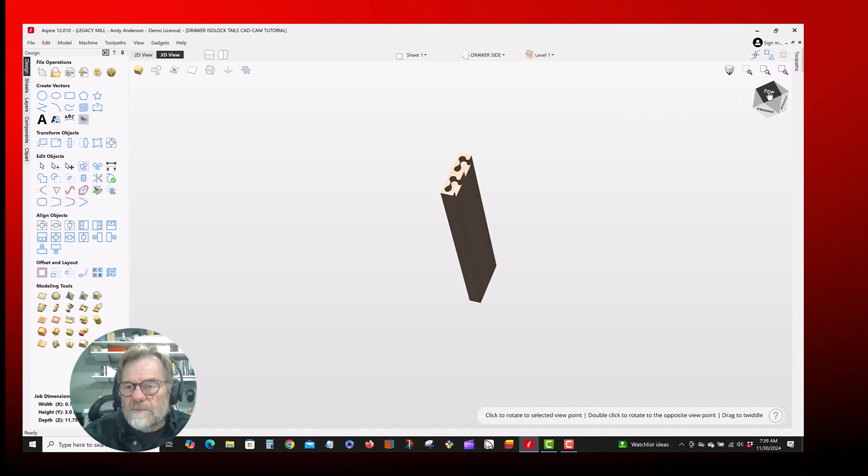I've already done the first step, which is to take the file we did in the last tutorial and copy it, rename it as tails in the CAD/CAM tutorial. The next thing we're going to do is take a top look. We're going to go back to the 2D drawing view, and there you'll see the reminder of what we created and the construction lines and everything we used. Then we created this side panel from that.

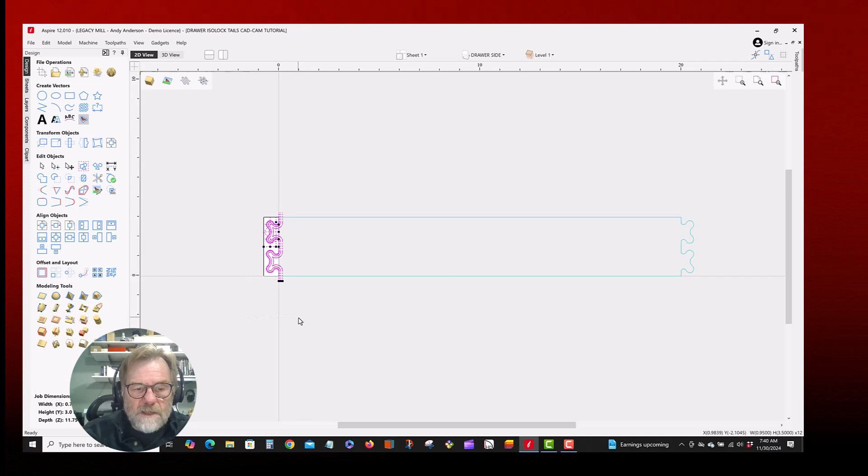So the next step is to do a little bit of house cleaning. We really don't need any of these vectors, so I'm just going to highlight them and delete them. And over here in the toolpaths, we have 4 toolpaths that we used to create the pocket, and we don't need those. So I'm just going to right click on that and delete everything that's visible. If I have a check mark, then it's considered visible. So we've got that out of the way.

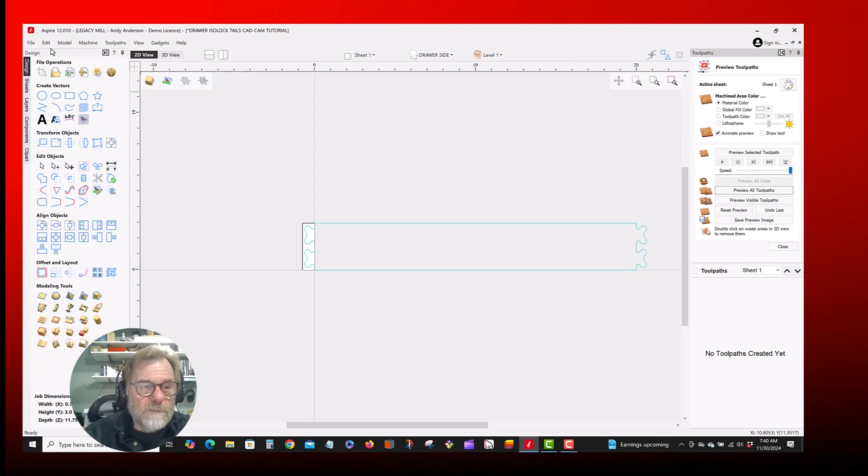Now we're ready to create the new part. To start a new part, we go to the edit pull down, drop down, and we're going to go to the job size. This drawer panel needs to be 21 3/4 inches deep. The height of this is 3 inches, but I'm going to make this 3.5 to give me a little bit of room to work, and the thickness will be 0.75.

Now on the pins, we cut that part vertically, so the material surface was my Z0 position. On this part, we're going to cut it on the machine bed, out of sheet goods, so we're going to move that. We're also going to change the XY datum point from the right side corner to the left side corner, which would be more traditional for sheet goods. Now my part is set up, so let's hit OK here.

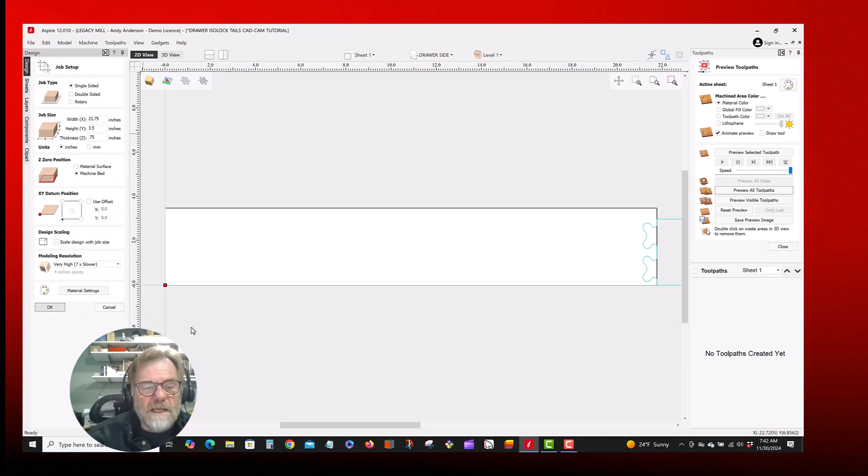And we'll go back and grab the side vectors that we drew in the last tutorial, and I'm just going to position it in the middle of my part. Now that it's positioned in the part, we can trim this up or do whatever we need to do to create the toolpaths. The first thing I want to do is modify this so that my tails and pins aren't a 0 fit.

I want to have a little bit of space in there, and to do that I'm going to use my offset tool here. Nope, I'm getting ahead of myself. To do that, I need to break this apart. So right now it's one continuous vector.

If I go to the node editing mode and I just click there and then right click, I can cut the vector, and that gives me a green dot indicating where I'm at. Now I'm going to break this one by doing the same thing, so I get another green dot, and I'm going to cut that vector, and do this, and cut that vector. Now I'm going to take this and do an offset.

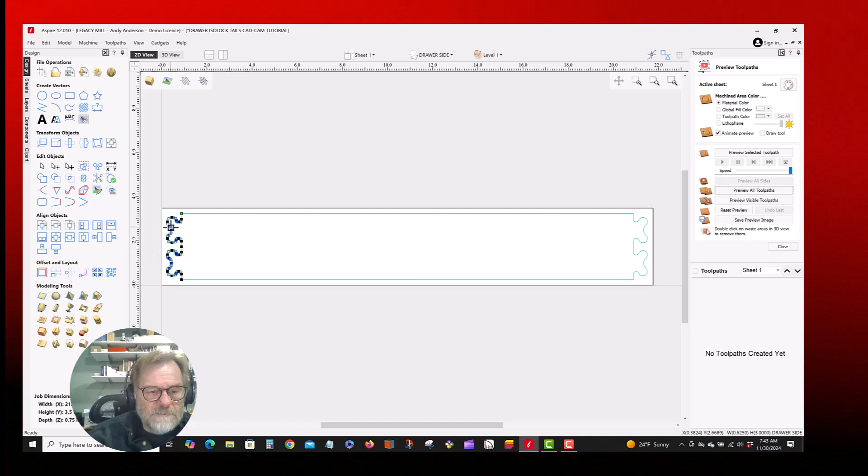Okay, now that I've broken the vectors, I have 4 separate vectors. I have one here, one here, one here, and of course one down here. We want to modify the end ones. I'm going to go over here and just go to the regular arrow so I can go back to regular editing. I'm not node editing anymore, so I'm just back to regular editing.

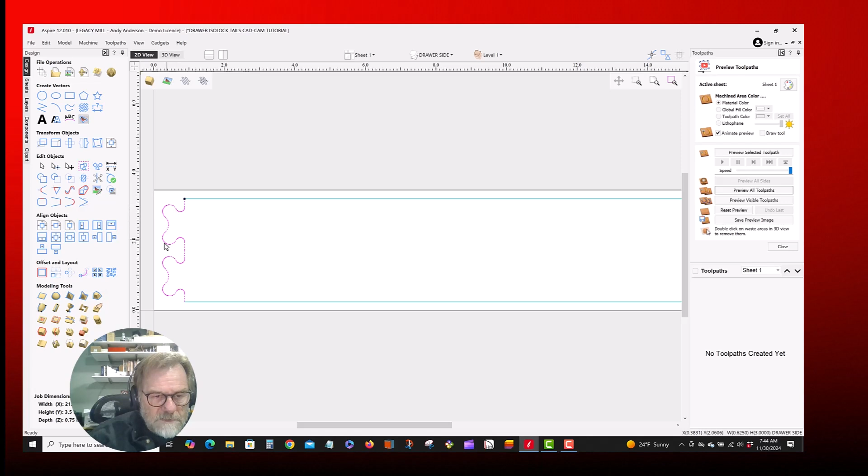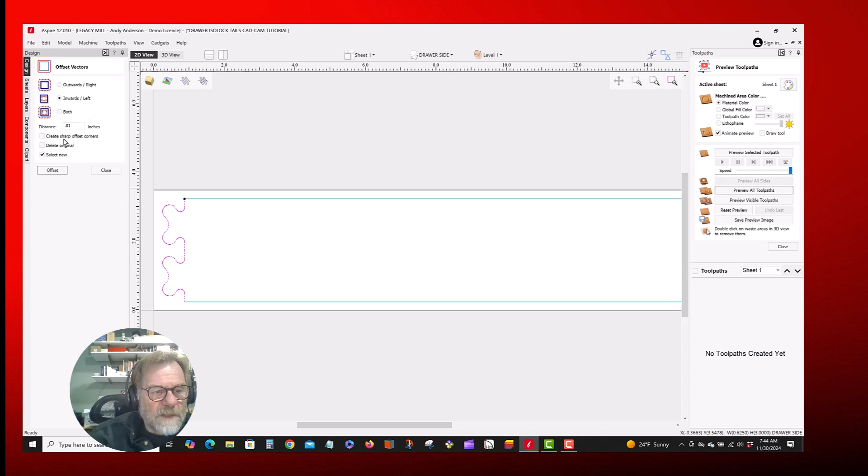So I highlight this, and I want to make these tails smaller by 0.010 of an inch. I'm going to go to my offset and move 10 thousandths. It's already set up at 10 thousandths. If I'm looking at the dot, the black dot facing the line, I can see that if I were going to move it this direction, it would be to my left side. So I'm going to put left. And I'm also going to delete the original and select the new one.

So there I go. Now if I zoom in real close, you can see that we moved over 0.010 of an inch, so those tails are now smaller by 10 thousandths of an inch. We're going to repeat that here, and standing at that point, looking, we'd be going to the right. So we're going to do that again. There we go. Now this is almost there.

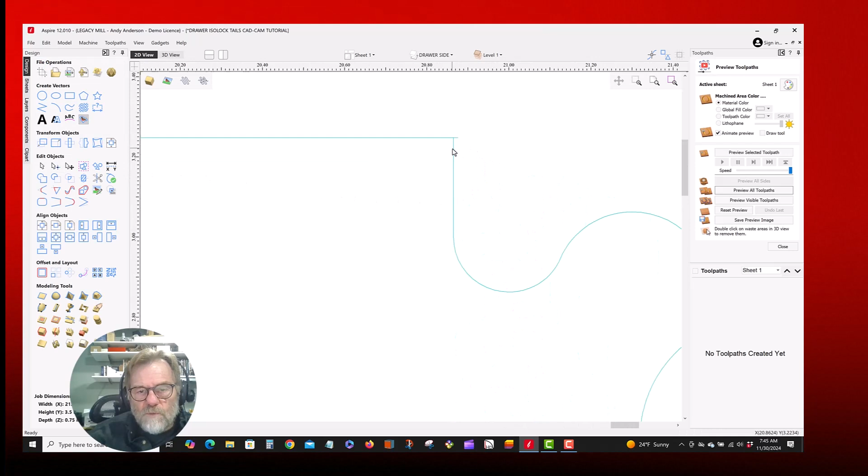I don't want to make my part shorter, I just want to make those tails smaller. So what I'm going to do is move to the end of that line by using my move tool. I'm going to go to the relative position, and in my x-axis I'm going to move 10,000ths. That's good.

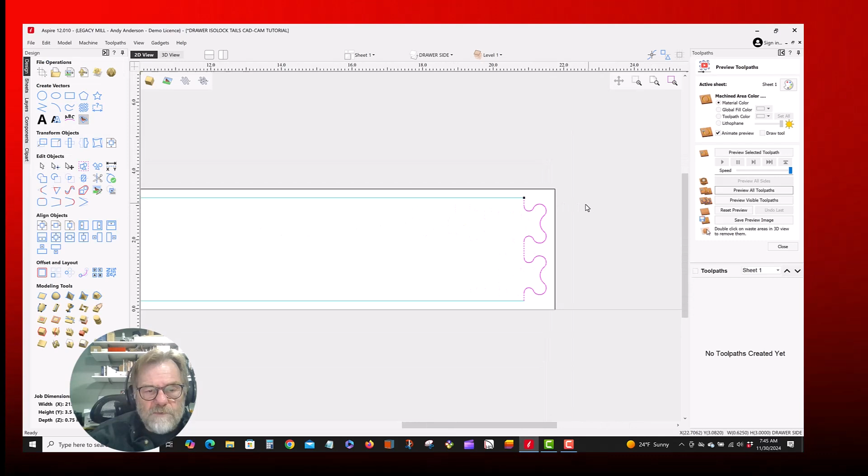Over here I need to go minus 10,000ths, minus 0.01, because we're going the opposite direction. Now I have tails that are just slightly smaller. We're going to take these, highlight them all, hold down shift, and use the join tool to join those together.

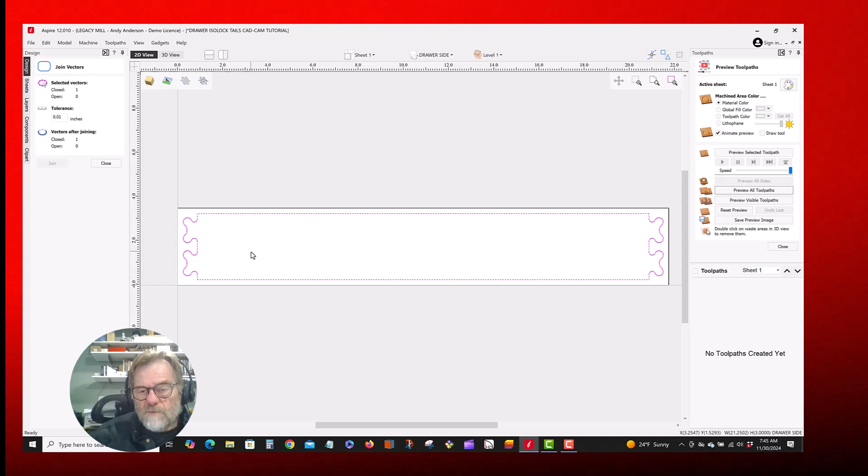Now we have one solid vector and we're ready to start creating the rest of the toolpaths. I'm going to go up to my layers. Layers, as you'll see as we move along, especially in the bonus section on how to build an array and transfer your toolpaths, are going to become important.

This says Isolock, I don't want it to be Isolock anymore, so let's rename this and call it the tail pocket. Let's take this one and rename it the bottom panel dado. We're not going to change the construction line, so we don't need to worry about that, and the drawer side is the drawer side.

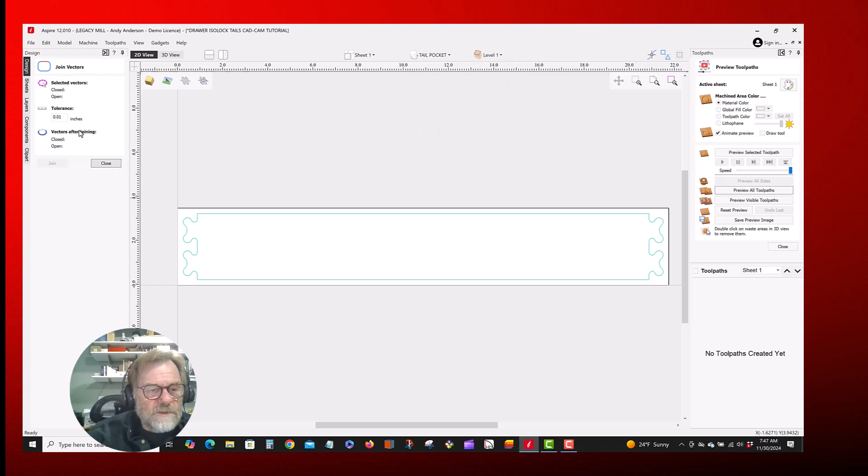Let's go back and start getting some work done. I'm going to switch to the tail pocket, and what I want to do is draw a box around the tails because I want to pocket that down. I have a 3/4 inch piece of material, and my pin pockets are only a 1/2 inch deep, so we want to take away a 1/4 inch of this material.

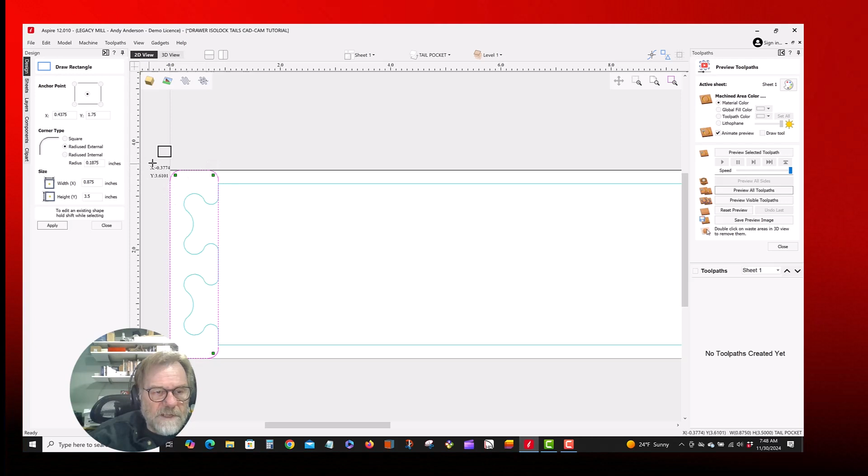Now we're going to create the rectangle pocket, and the thing I love about Vectric's Aspire software is when I hover over that I get that semi-construction line. When I hold the mouse key down I can just slide here and I've created that. Now I left this with some radius corners, and that's just fine, so that will become one of the pockets on the pins.

I'm going to come over here and do the same thing, just hover there for a second, then move up to the edge of my material, slide down to the bottom corner, and let go of the mouse. Now I've got 2 pockets ready to go. That was pretty easy.

Let's go to the bottom dado panel. This is important to make sure we keep everything organized. We're going to create another rectangle here, and this rectangle is going to be 20 3/8 long.

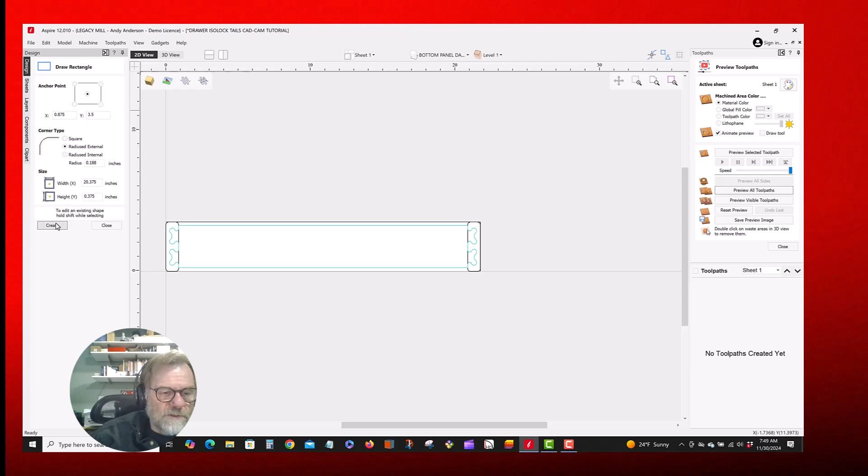I practiced a little bit so the numbers are already hanging in there, and 3/8 wide. Here I can choose exactly where I want to put it, but I'm not going to worry too much about that because I'll show you how I just move things around. So I'll create that, and for right now I'll just stick it in the middle of the part.

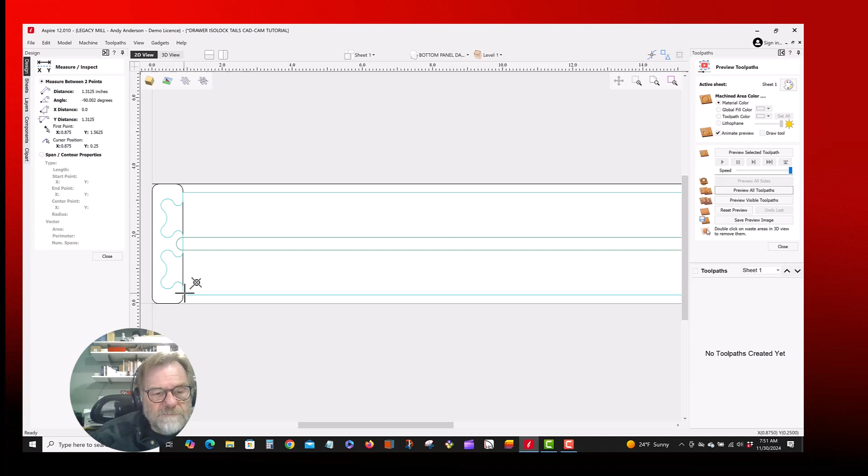Now it's all set up and ready to go, other than the vertical position. So from here to here should be 3/8 of an inch. Let's just measure this and see where it actually is. So it's 1.312, or 1 5/16.

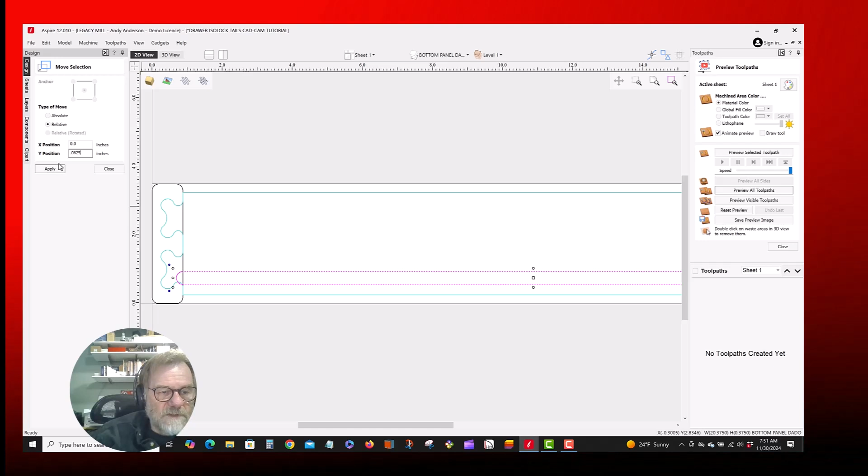I have the move tool over here, and I could do the fancy math, but I'm lazy. So if I just start here and say I'm going to move this -1, then I'm at 0.312. Now I know I want to be at 0.375, so if I add 0.0625, or a 1/16 of an inch, and move it up, there we go.

Then I'm at the right point, at least I think so. Let's double check—yeah, 375. So that's my little trick. I don't like to grab a calculator and do the calculations; I do what I can in my head and just make small jumps until I get it where I want.

Now I'm ready to start making toolpaths. I like to think of this first in terms of the tools I want to use. To cut this dado, it's 3/8 of an inch wide, so if I use a 1/4 inch bit and slide around the inside, I'll get a nice clean cut. It'll work fine—I've got 1/8 inch radiuses and a 1/4 inch tool that will cut into this little section here, so a 1/4 inch bit will work fine for my outside profiles as well.

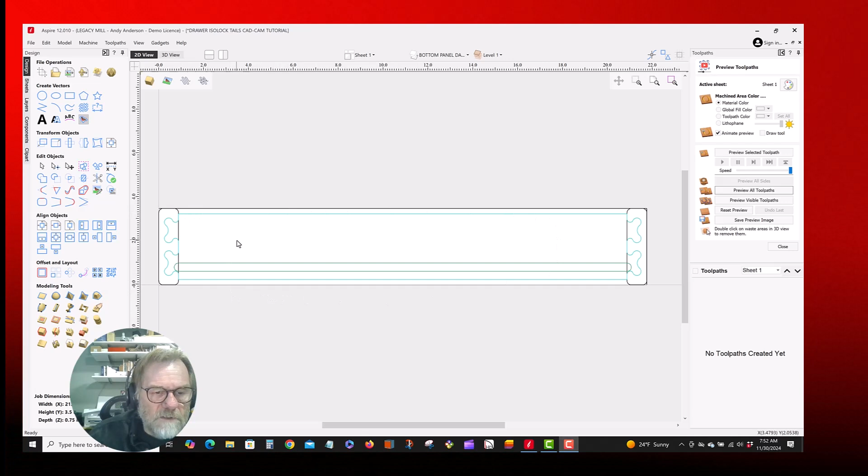But I've got a big pocket to cut away here first, and I think I'll use a 1/2 inch cutter for that. So I'm going to select both of them while I'm at it by holding down the shift key. You guys know this, but I'm anal, so I'm going to keep saying the things I need to do—it helps me keep things right.

Now I'm going to create a tool path. To do this, I'm going to go inside the line with a bit that is... there we go, a 1/2 inch end mill. Now I'm actually going to use a compression bit for this.

I want this to be 0.25 deep. The remaining part, the part sitting down against the table, I want that to be a half inch thick, so .25 deep here. I'm going to go inside of that line. This is just my own thing, but I like to use ramps whenever I cut anything. It's a little easier on the tool. I'm just going to call this the tail pockets.

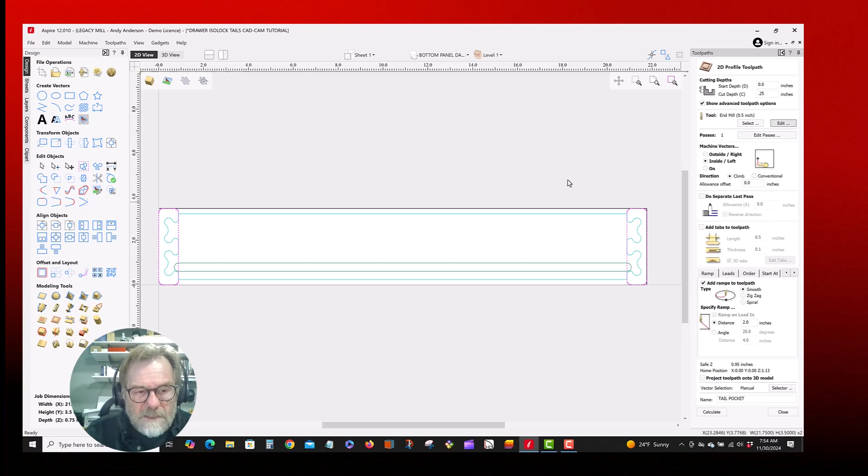I'm going to check my feed rates on this. I usually use this bit for just cutting out big sections of material, so it's running at 300 inches a minute. I'm only traveling 3 inches, so it's going to be a bit too fast for this. I'm just going to run this down to 150. I often change my plunge rate to half of my feed rate, but in this case I'm going to leave it the same because I'm using that ramped cut, so I don't need to slow down that cut.

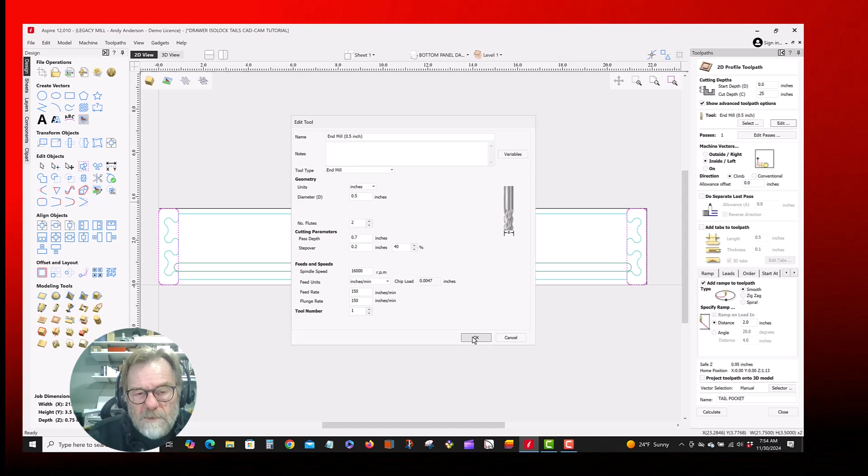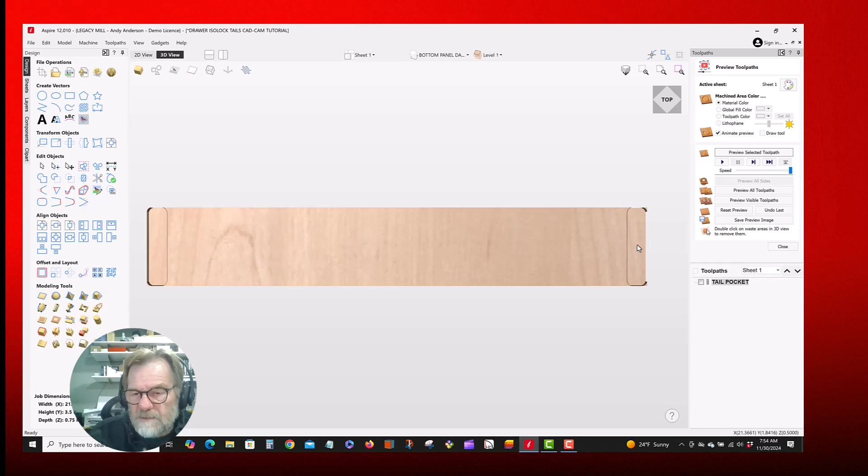We're going to hit OK, and then we're going to calculate that. We'll just preview the selected tool path, and you can see that I've got a nice clean cut. If I hover over that section down in the bottom right hand corner, it tells you it's 0.5. Remember, we're working off the base, the bottom edge, so that tells me that's exactly how thick that tail is going to be, a half inch. That's what I want. I'm all good.

Now we're going to go to a quarter inch bit, but we're going to use almost the same tool cut conditions. I'm going to get my quarter inch bit. I'm going to go 375 deep, and cut that. I'm going to be inside the vector. I'm going to also add a ramp, and I'm going to call this the bottom panel dado. Let's just preview that. I like this other view.

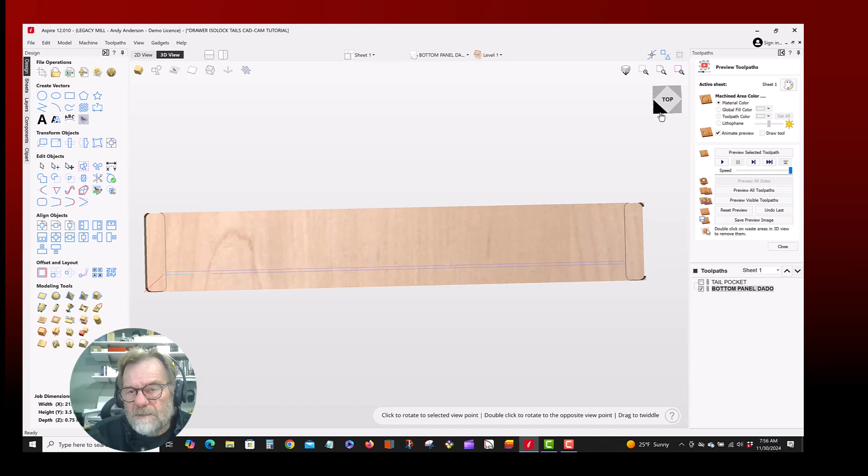All right, everything's looking good to me so far. All I need to do is cut the part out now. So if I look at this, go back to these views, I'm going to go to my outer profile. Now I'll do this in two steps. This is something that I was taught by one of the cabinet makers, Mike Smarza. I like this process a lot.

I'm going to go down here and have my offset allowance at 30 thousandths. I'm going to change my cut depth to 0.72, so that won't cut all the way through. It'll leave a small onion skin of about 30 thousandths. So I'm going to go down now. I will do some ramps on this again, and I'm going to call this the rough pass on our profile.

But here we are, we have the rough pass. We're going to duplicate the rough pass. When we open this up, we've got a few things to do. The first thing we'll do is we'll rename it, so this is going to be my finish pass. Let's start at the top.

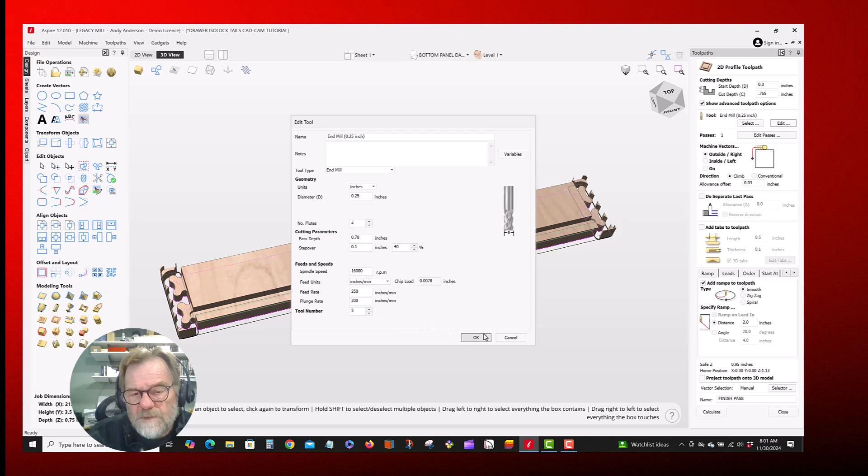We want this to cut through the material. I like about 15 thousandths, gives me a nice clean edge on the bottom. So that's 765. Same bit. Let's look at the speeds. So 250 and 200, that's pretty good. I'll be fine with that, especially where I'm ramping. We're going to come to that in a minute.

I'm also going to add some tabs, because this is a long, skinny part and there's not much for the vacuum to work with. So I want to be a little careful and put in some tabs. I'm going to go edit my tabs over here, and this is the tab I like. This is my format — you can use whatever you want, but about a half inch of material is fine, no thicker than a tenth of an inch. I use the 3D tab, which means it goes up and then back down as it cuts the tab, so it's a little pyramid. All I need to do here is hit edit tabs and I'll put them in where I want them.

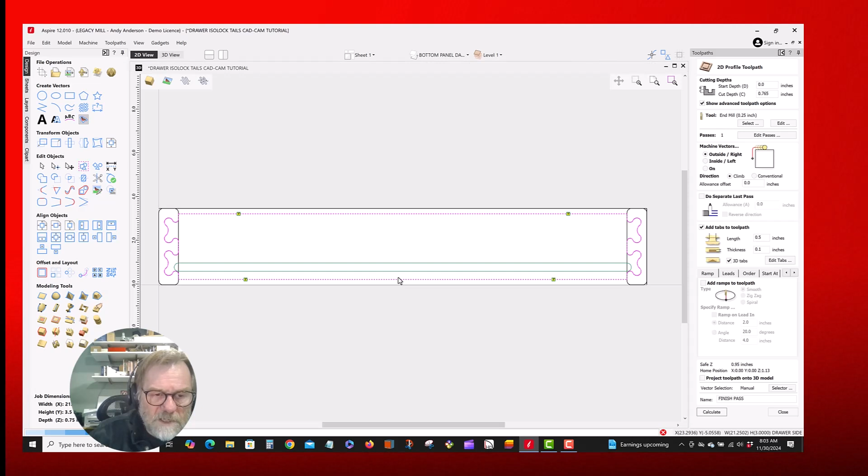Now, if I cut multiple parts, one will be right above the other, so I don't want them stacked up — they won't be quite as useful if they're right stacked on top of each other. So now we're going to go down, just double check the right depth, no offset, good speed, calculate. And yep, it's giving me the message that we're going to cut all the way through the material.

So let's reset and preview all of our toolpaths. There's our tail pockets, there's our dado for the bottom panel, and now it's all cut to size. There you have it, we have completed the part. We could run out and run a prototype.

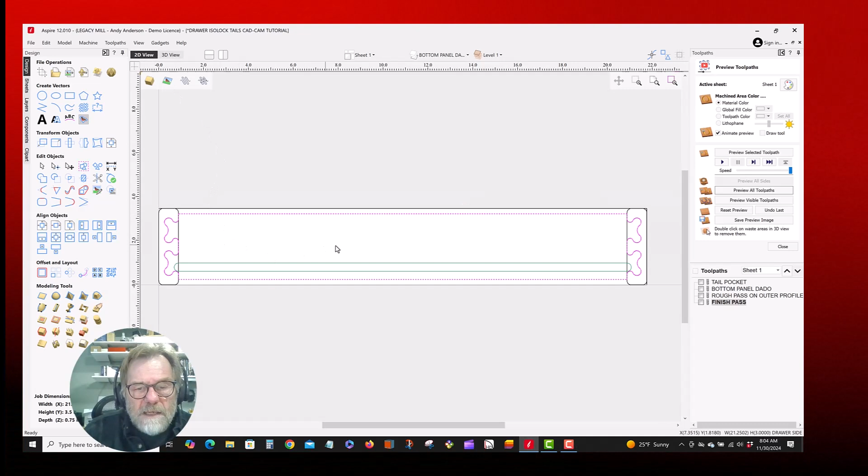I'm going to go to the drawing view here, and here's one single part. Clearly, I'm not going to make one part for a whole batch of drawers. I have to make 18 drawers, so in the end I need 36. But let's just make 12 of these right now.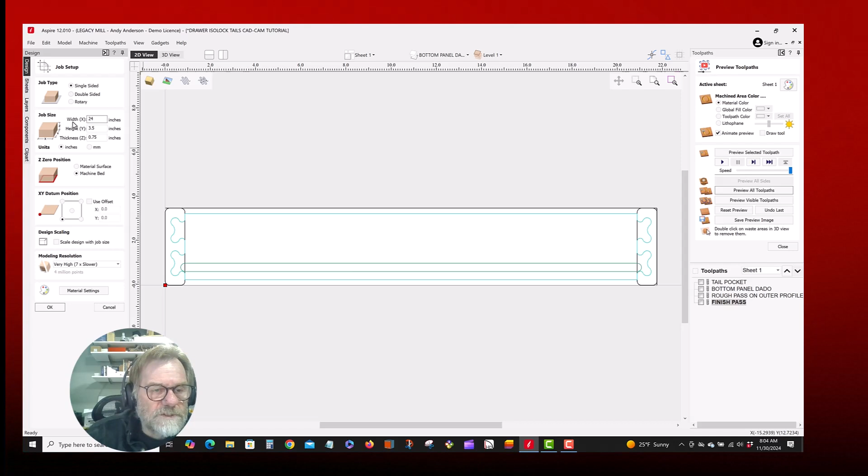So I'm going to go to my job size and change it first. Single-sided doesn't change, but the width we'll just put at 24 inches. Our height is going to be 48 because I'm going to use the first section of my vacuum table. Still 3/4 of an inch thick, still in inches, still the machine bed, still left-hand corner. Everything's good.

Now it's automatically going to recalculate for me, and that's fine. I want to go up to my layers and make sure that everything's on, because if you move things with just one of these off, that part doesn't move. When you're moving stuff, you've got to make sure everything is on if you want it all to move.

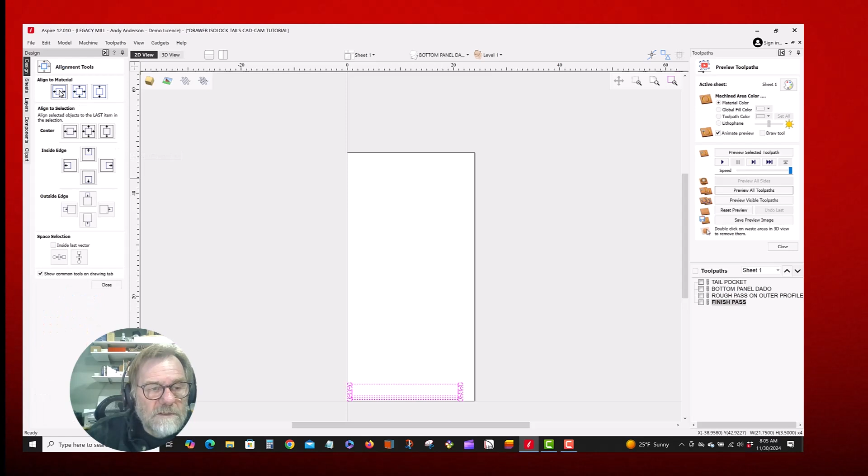Now I'm going to use this clever little tool here and move it just to the center. And then I'm going to use my arrow keys to just nudge this up a little bit.

Now I'm ready to do the array. The array will let me make 12 parts. I practiced a little bit, so I know I can get 12 parts. And the way I'm going to separate the parts is not using the offset, but the gap.

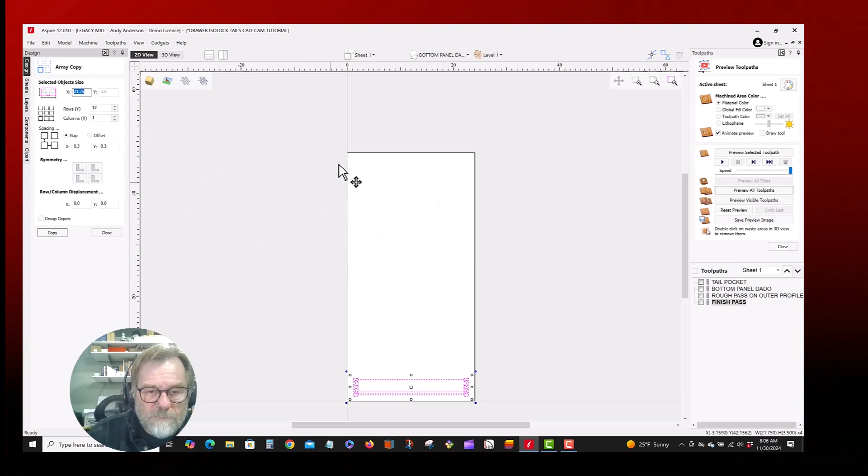I want 3/10 of an inch gap all the way around each part. I'm going to have 12 rows, of course, go this way. Columns go up and down. Now there goes our copy.

Now we'll reset and preview the toolpath here. We have 12 parts we want to make, so how are we going to get that? So let's see, we could hit tail pocket, and we could go and hold the shift key down and grab each one of these. But the people at Vectric are geniuses, at least I think so compared to me.

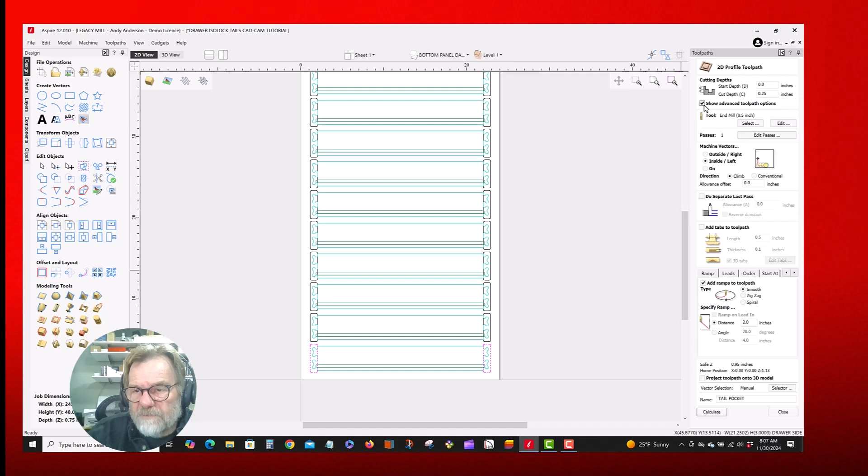So if I go to tail pocket, I just want to make sure I've clicked this box up here, Show Advanced Toolpath Options. Then I'm going to come down here to the selector, the vector selection. I'm going to hit selector here, and I'm going to get a little box. The box is going to ask me what I want to work with, and I can do open and closed vectors. All of my vectors are closed.

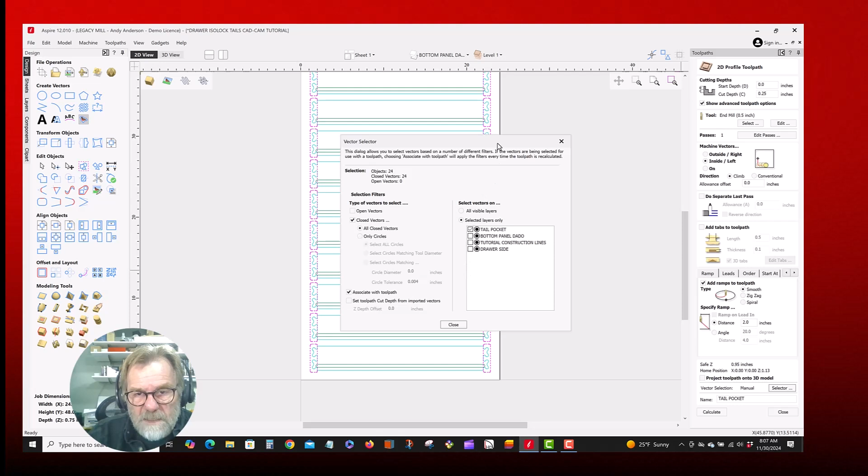And then I want to associate this with a toolpath. So I'm going to associate here, and this isn't going to be the drawer side. I'm going to go do all the tail pockets, and you see how they all just went magenta, as if I just went and clicked them all. When I calculate that now, again, this is why I think these guys are geniuses. There you go, all of my pockets are put in.

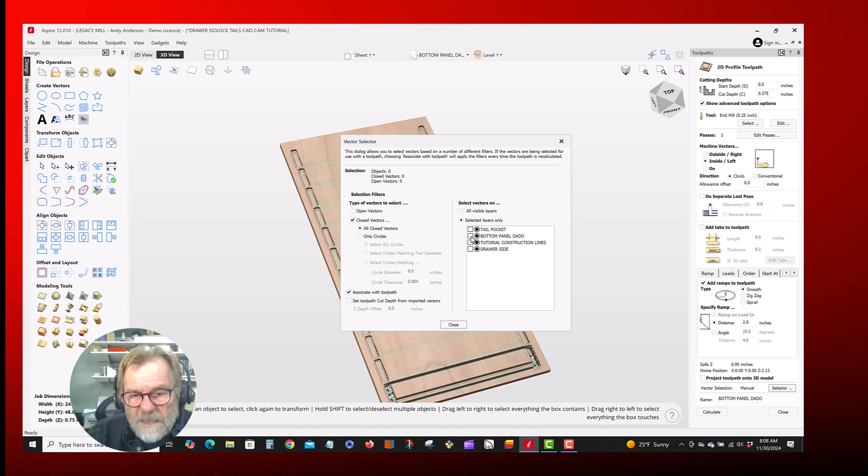Let's go do the same thing on the bottom panel. So we're going to go back to my vectors down here, select the vector. We're going to say associate, and make sure you don't have any extras clicked. We just want the bottom panel, and we will calculate that. And we'll preview that. Perfect.

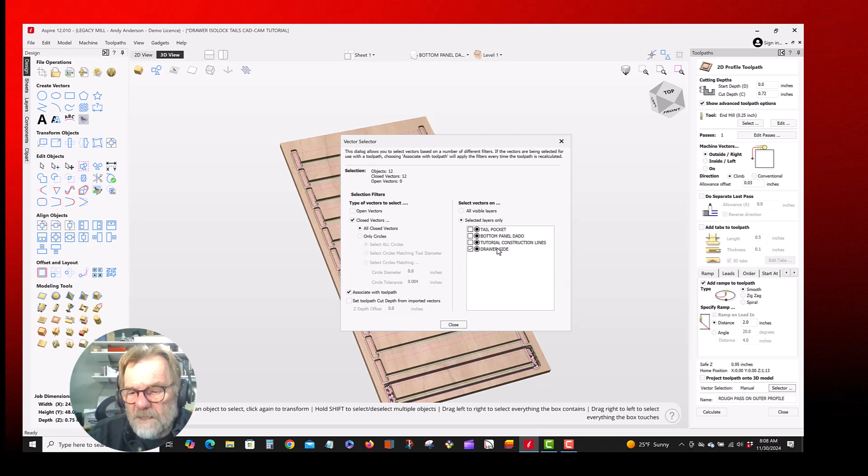We'll go to the rough panel, or the rough pass. We're going to do the same thing. Now we're going to associate with toolpath. This one is the drawer side, and for the next two steps we're going to associate that with that part. Now this is why I like the vectors inside of layers—it lets me associate each one of these tools with a particular layer. I make them all different colors, so it's easy for me to figure out what's going on. Let's preview that toolpath there. There we go. Now, finish pass.

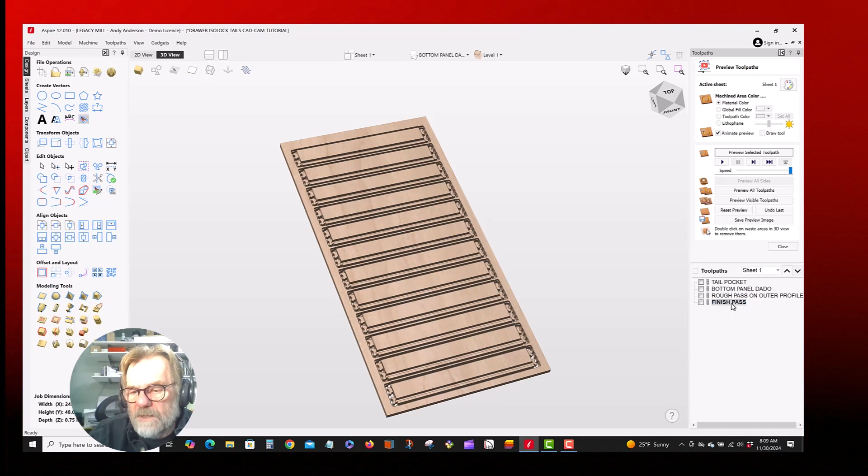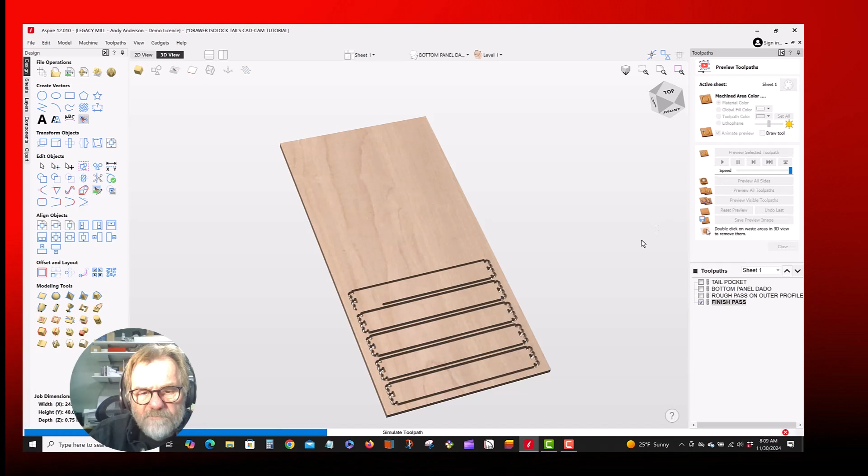Reset, and then we preview all of the selected parts. Okay, there's our preview of all 12 parts. So there's the end of the bonus section of this video, how to take a single part and transfer all the toolpaths to an array of parts using the vector selection tools.